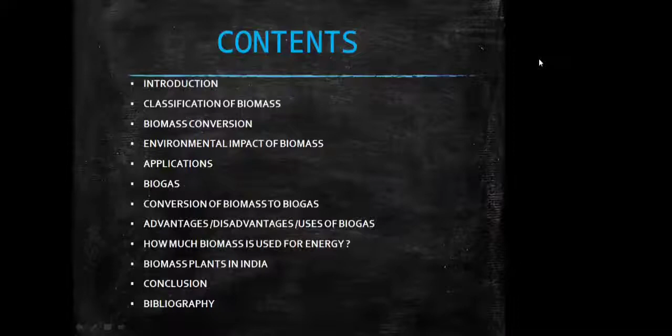Here we are to know about biomass, presented by Ira Verma, Atrikar and Lokesh Nahar, with content of introduction, classification, impact, application, conversion, and many more.

So, biomass is defined as plant and animal material used as fuel to produce electricity or heat, such as wood, energy crops, waste material from forests, yards and farms. As we can use biomass directly and it can be converted directly into liquid fuels, it can also be known as biofuels.

Biomass is actually any organic matter which can be used as an energy source. From ancient times, people have been using natural organic material for different purposes like cooking, warming the surroundings, etc. So it can also be in the category of the oldest source of energy, excluding the sun. After all, the sun is directly and indirectly related to all. Now I would like to ask Adri to give us further information about classification of biomass.

Classification of biomass. Due to substantial differences in terms of variety and quantity of biomass and their different compositional characteristics, there is no univocal way of classification of biomass. So, they can be grouped differently depending on purpose and scope. Biomass can be classified in four ways: forestry biomass, agricultural biomass, energy crops, and municipal solid waste.

Forestry biomass can be further categorized into primary, secondary, and tertiary biomasses. Agricultural biomass can be divided into two types: biomass from crop residues, and litter and dung of animals. Energy crops can also be divided into two parts: woody biomass, which is produced by species like bamboo, and starch, which is produced by species like root crops, etc.

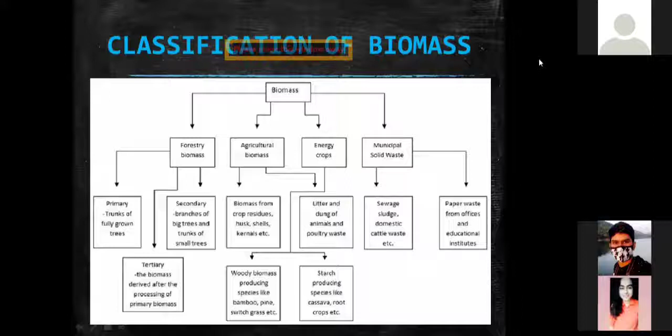Then, municipal solid waste can also be of two parts. One is sewage sludge, domestic cattle waste, etc. And the other is the paper waste from institutes and offices.

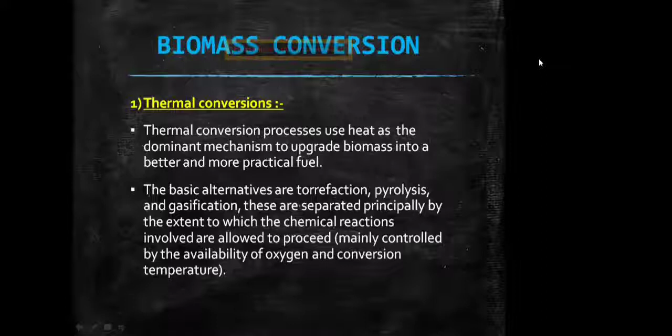Now, biomass conversion. Biomass conversion is a shared area between hydrogen production and biogas production. It is proving to be an important option for several applications, including energy and chemical production. First one is thermal conversion. This conversion is used to produce heat. This process uses heat as the dominant mechanism to upgrade biomass into a better and more practical fuel. The basic alternatives are torrefaction, pyrolysis, and gasification.

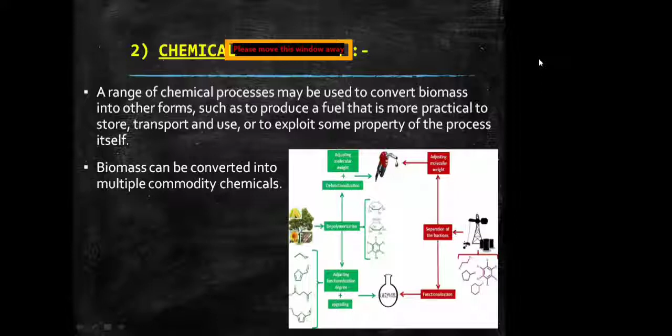Next comes chemical conversion. This conversion is used to produce liquid fuels that are more practical to store, transport, and use. Biomass can be converted into multiple commodity chemicals. Next comes biochemical conversion. This is used to produce gaseous and liquid fuels. Here, microorganisms are used to perform this process. This process includes anaerobic digestion, fermentation, and composting.

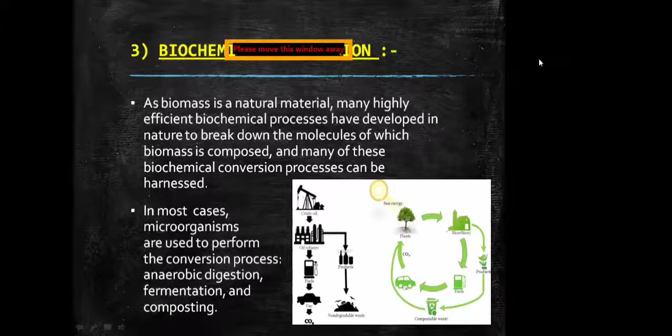Lastly, electrochemical conversion. Here, biomass can be directly converted into electrical energy by electrochemical oxidation of the material. This can be performed directly in a direct carbon fuel cell, or direct liquid fuel cells such as a direct ethanol fuel cell, a direct methanol fuel cell, and a direct formic acid fuel cell.

The fuel can also be consumed indirectly via a fuel cell system containing a reformer which converts the biomass into a mixture of carbon monoxide and hydrogen before it is consumed in the fuel cell.

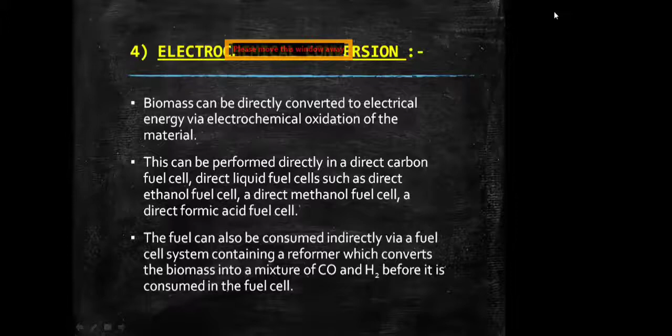Now, there are some environmental impacts of biomass. Bioenergy is a unique type of renewable energy. Unlike solar, wind, and hydropower, generating power from biomass emits greenhouse gases and pollutants into the air. However, because of the renewable nature of biomass, many consider it to be a carbon neutral source of electricity. Hence, it has both positive and negative impacts on our environment.

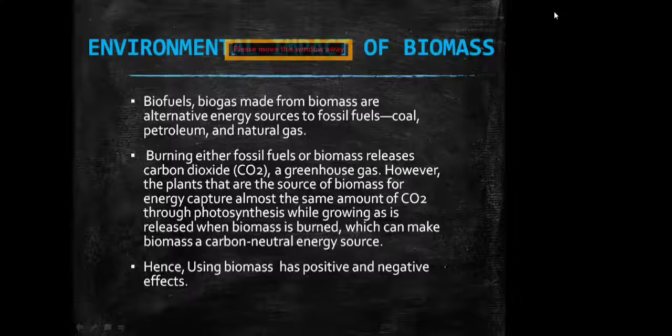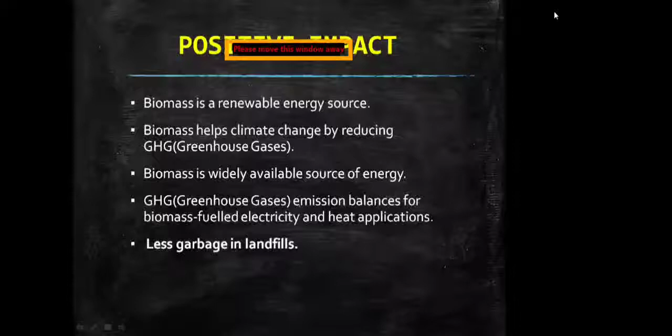Let's look at some positive impacts of biomass. Biomass is a renewable energy source. It produces less greenhouse gas compared to fossil fuels. Biomass is a widely available source of energy. Its emissions balance for biomass-fuelled electricity, and heat applications. It causes less garbage in landfills.

Next come some negative impacts. Biomass leads to deforestation and farming practices. It takes a lot of water. It causes air emissions and pollution. Biomass plants require a lot of space.

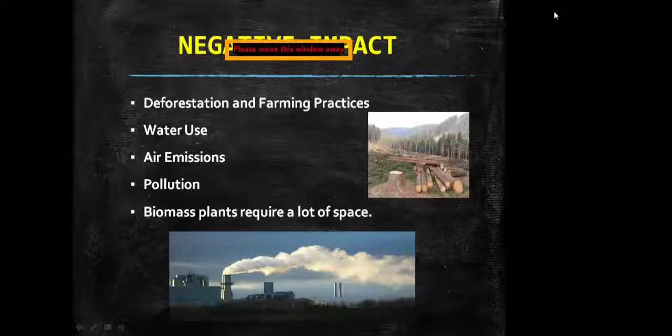Now it's about some applications of biomass. Biomass systems range from small stoves used in homes for heating or cooking to large power plants used by centralized utilities to produce electricity. In residential applications, biomass can be used for space heating or for cooking. Wood is the most common source of fuel, although many different materials are used.

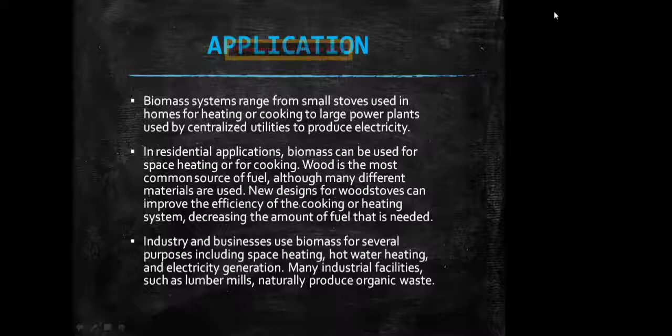New designs for wood stoves can improve the efficiency of the cooking or heating system, decreasing the amount of fuel that is needed. Industry and businesses use biomass for several purposes, including space heating, hot water heating, and electricity generation. Many industrial facilities, such as lumber mills, naturally produce organic waste.

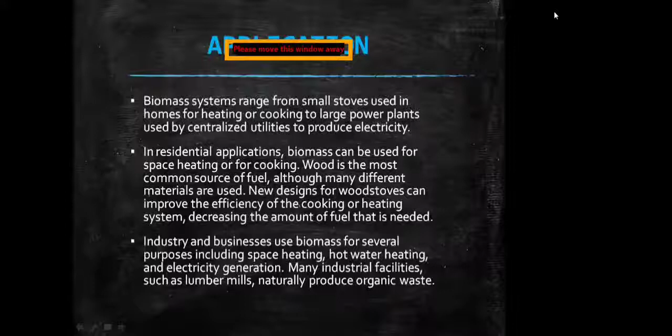Now I'll ask Lokesh to continue further.

Thank you, Atri. Biogas. Now let's see what is biogas. So basically, biogas is a renewable fuel produced by the breakdown of organic matter such as food scraps and animal waste. It can be used in a variety of ways, including as a vehicle fuel and for heating and electricity generation. It's produced when organic matter such as food or animal waste is broken down by microorganisms in the absence of oxygen in a process called anaerobic digestion. For this to take place, the waste material needs to be enclosed in an environment where there is no oxygen.

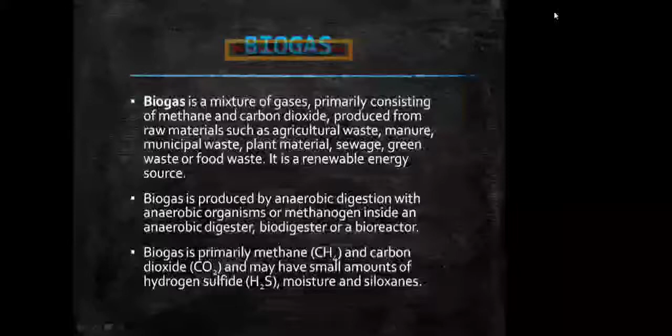Now, let's look at the schematic diagram of biogas. So here is the diagram of biogas. Now let's see the working. How does it work? So the plant has a dome-like structure built with bricks. A slurry of cow dung and water is made in the mixing tank from where it is fed into the digester. The digester is a sealed chamber in which there is no oxygen. Anaerobic microorganisms that do not require oxygen decompose or break down complex compounds of cow dung slurry.

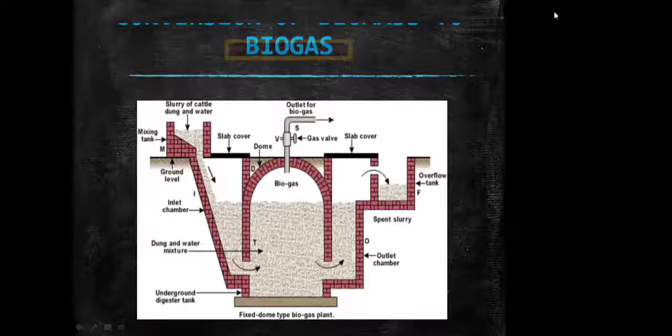It takes a few days for the decomposition process to be complete and generate gases like methane, carbon dioxide, hydrogen, and hydrogen sulfide. The biogas is stored in the gas tank above the digester from which it is drawn through pipes for use. Now let's see some advantages of biogas.

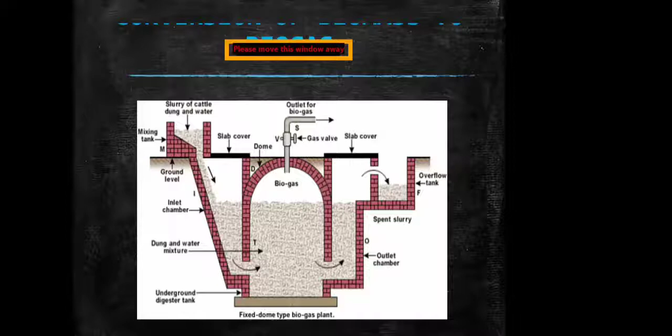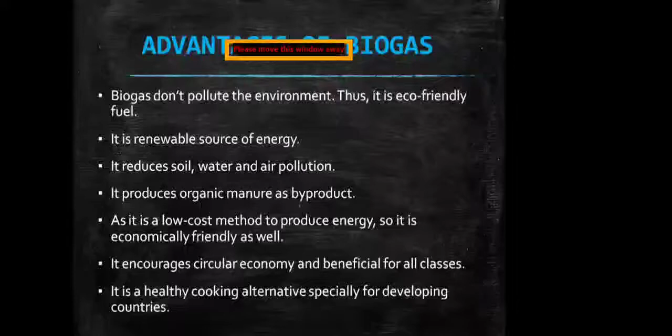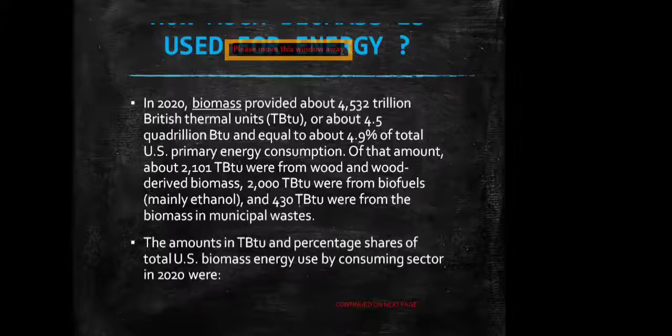So now, how much biomass is used for energy? In 2020, according to the statistics, biomass provided about 4,532 trillion British thermal units, or about 4.5 quadrillion BTU, equal to about 4.9% of total US primary energy consumption. Of that amount, about 2,101 TBtu were from wood and wood-derived biomass, 2,000 TBtu were from biofuels, mainly ethanol, and 430 TBtu were from biomass in municipal waste.

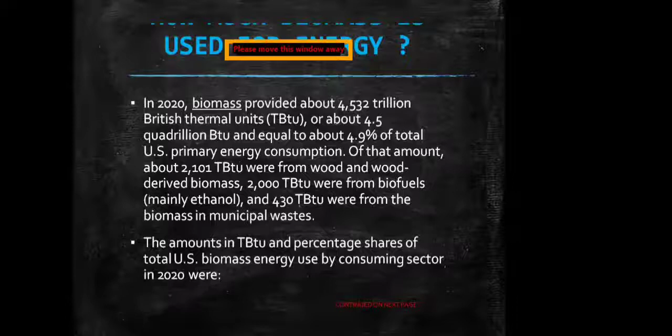The amount in TBtu and percentage share of total US biomass energy used by consuming sectors in 2020 were: industrial, transportation, residential, electric power, commercial. The industrial and transportation sectors account for the largest amount in terms of energy content and the largest percentage share of total annual US biomass consumption.

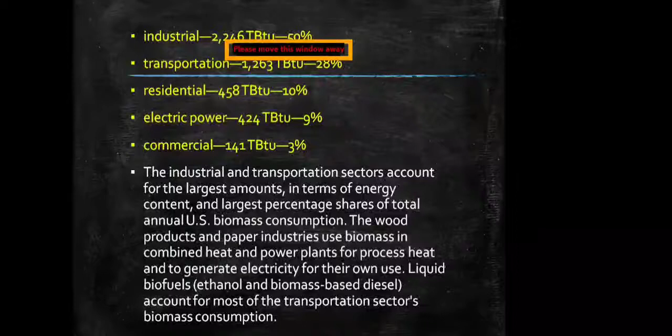The wood products and paper industries use biomass in combined heat and power plants for process heat and to generate electricity for their own use. Liquid biofuels account for most of the transportation sector's use. From this, Lokesh will be carrying on with the information on biomass plants in India.

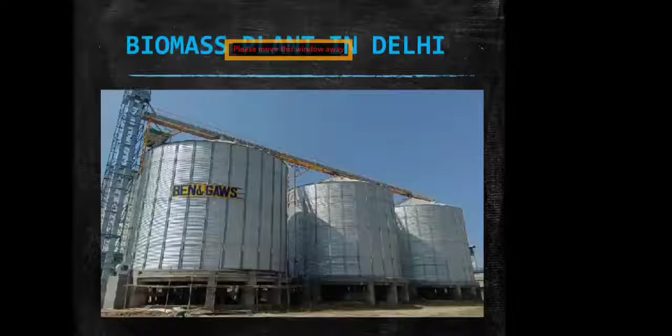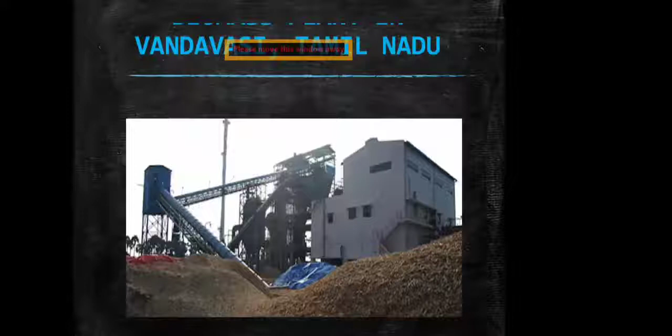All right, it's time to conclude our presentation. Biomass and biogas use low cost waste material. Recycling of this waste material can be a solution to the problems of disposing of waste products. It reduces dependence on foreign oil. Biomass plants operate in a reliable and consistent manner, providing crucial base load power generation.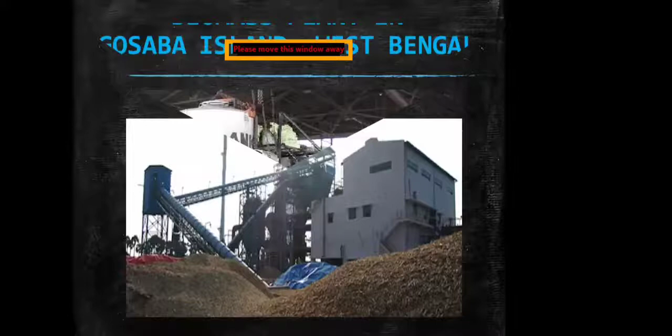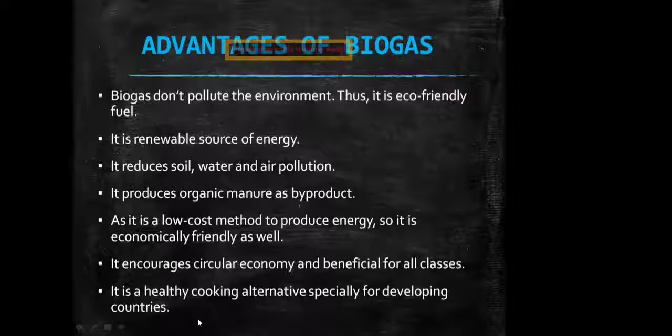Okay. Next page. Lokesh, next page. Go to next page. Acha.

You said that biogas contains some impurities. What are the impurities present in biogas? Which type of impurities are present in biogas? Lokesh? So, yes sir, impurities - meaning the leftover gases which are left in the biogas: nitrogen, oxygen, hydrogen sulfide, and ammonia.

Ammonia, okay. That means this gas is used for another purpose. Is this gas used for another purpose? It can be used and cannot be, sir. For example, when the biogas is made, some slurry is left behind, which is rich in nitrogen and phosphorus, which is used on farms for growing crops.

Acha, okay. Next point - tell me the effect of temperature on biogas production. What is the temperature required for biogas production? Generally the temperature which the digester needs is 37 degrees Celsius. Okay, and in winter season we require additional heat supply. So it is very close to normal room temperature.

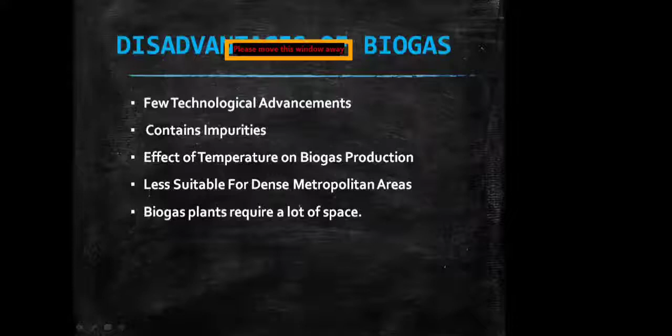So it is kind of a disadvantage - there is no constant temperature. It is not a massive disadvantage, it is a minimal disadvantage using this temperature. It is a minimal disadvantage at 37 degrees Celsius, it is tolerant. Okay, acha, now next part.

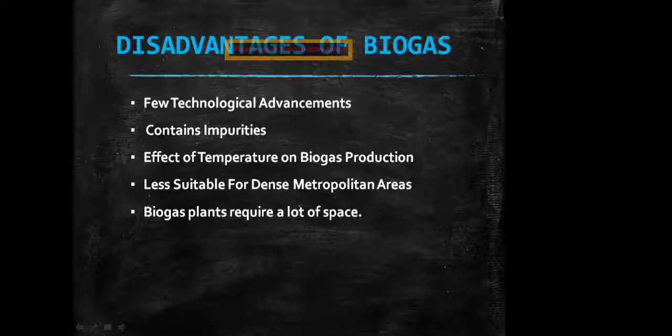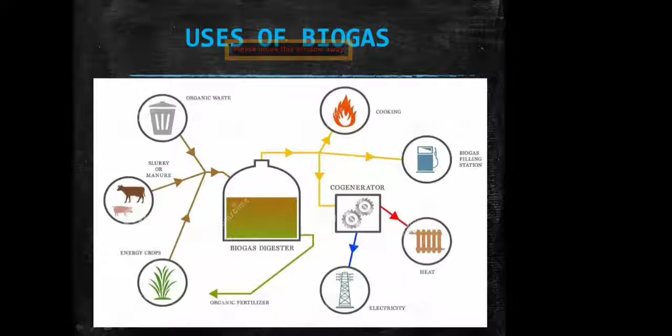Next part, go to next page. Acha, now from the biogas we have to generate electricity. How much amount of electricity is generated using biogas? So technically, I don't know the exact number. What is the number? What is the percentage that we need? Acha, acha, acha.

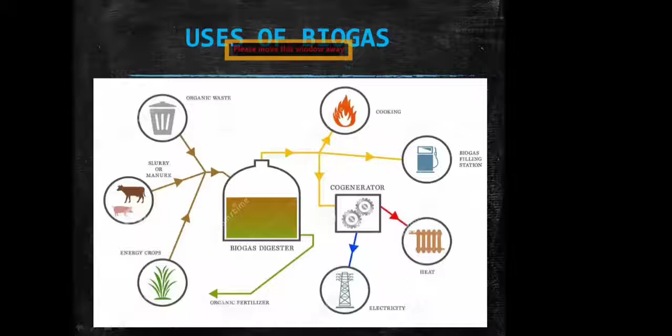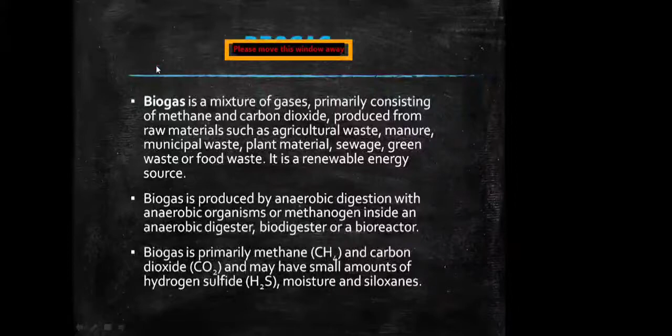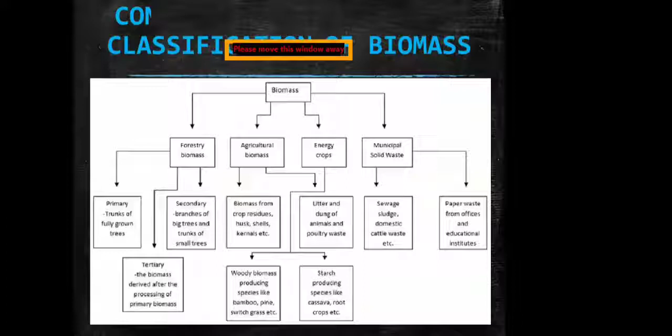So municipal solid waste - how can you separate biomass from municipal solid waste? Because municipal solid waste contains different types of waste, plastic waste.